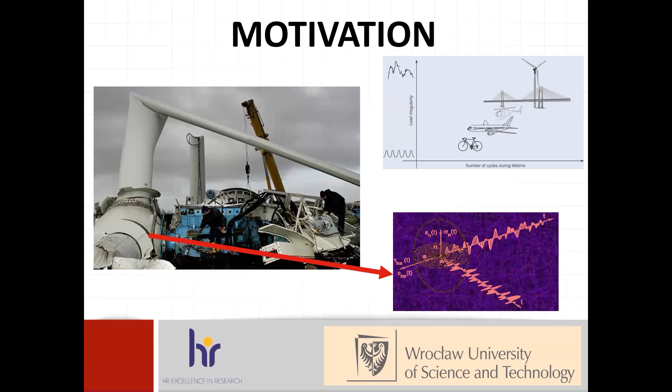Since we use multi-axial loading, if we look at the map, we can see that with the number of cycles required for failure and load irregularity, like in wind turbines or bridges, this is the crucial point in modeling: to provide robust, resistant models, for instance regarding stress ratio.

As Professor Sedlak said, bridges are the most important part, but not so much at this presentation. I think we're in second place after St. Petersburg in the number of bridges. But to be honest, in the guidelines we find it's more than 100, including pedestrian areas, so it's not as huge a number as we advertise.

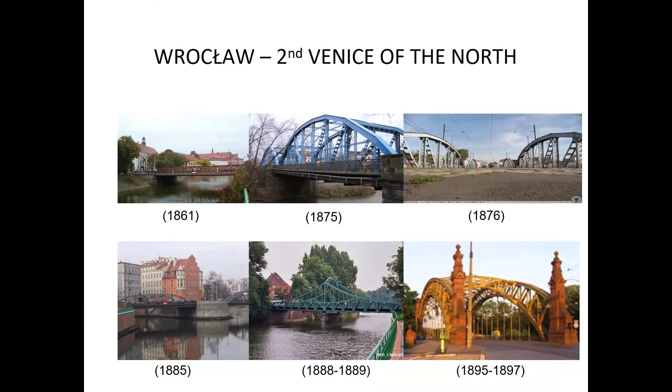Many of them were built in the 19th century, and we can also find in Europe, or in the world, a lot of old bridges, and especially from time to time we find cracks. Of course, we find cracks in many different objects.

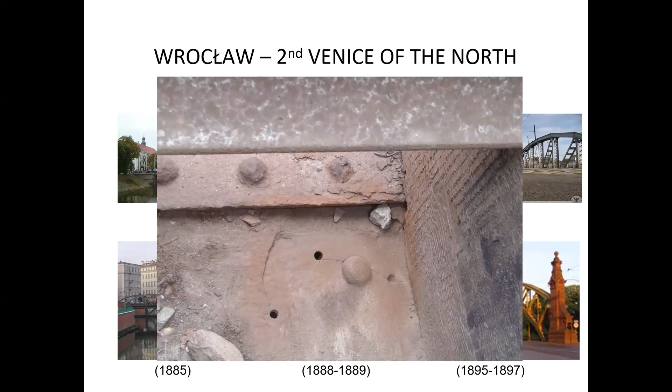The key problem is: if you found the crack, how long can the crack be operated? And typically, what is the main problem with the propagation?

I think the most celebrated equation comes from Professor Paris, who was also in Belgrade at the ICF conference. Paul Paris was with the family. Yes, that's true, but also it will be about the J-integral later.

So I memorized: delta K raised to the m power, with constant C, is the most famous, like E=mc squared in physics, equation in fracture mechanics crack growth. But in fact, sometimes we have a lot of problems with the proper description.

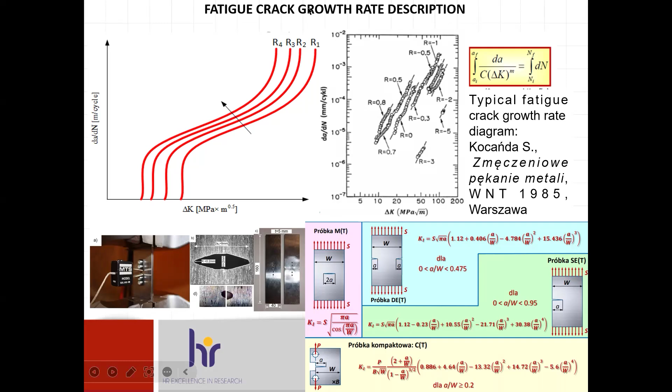For instance, if we see different stress ratios, we still need to calibrate. Of course, we can use different models, but which one is correct, regarding that E=mc squared analogy?

I found one interesting statement from Albert Einstein that captures, let's say, the mystery of fatigue growth rate description — but we always try to pick the experimental data and discuss it through semi-empirical properties.

If we look at different calculations, we still use in books on fracture mechanics a very simple approach, also adapted for numerical methods, using for instance Paris law, or maybe Walker, or Forman, with respect to stress ratio. Or, if someone is interested in more detail, one can use Forman-Mettu or the NASGRO equation, which is a 9-parameter model — really hard to find the constants for that model.

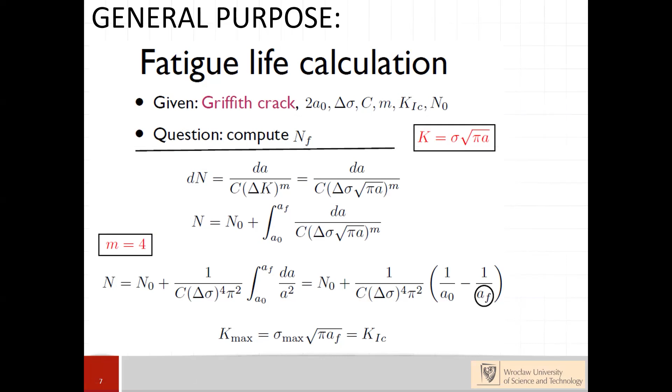We still use Paris law because it's the easiest and cheapest from an experimental perspective. We also use a fracture criterion for measuring the final stage of crack growth, and finally we can compute it by integrating the differential equation.

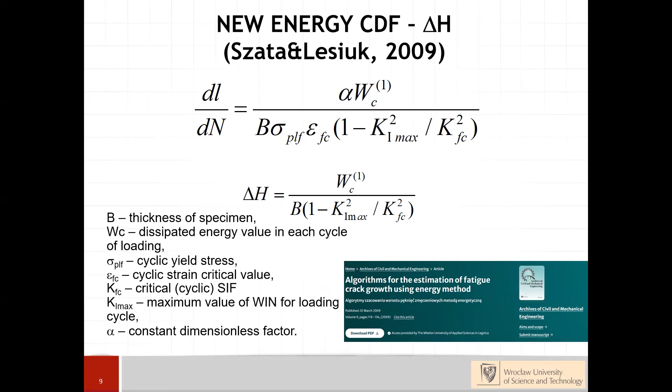However, if we look further — I want to screen a whole generation of models based on dissipated energy. We can build not one, not tens, but hundreds of different models connected to dissipated heat, energy, and strain energy density factors. In this case, it was a kind of model based on the hysteresis loop area — and what is the main advantage of this?

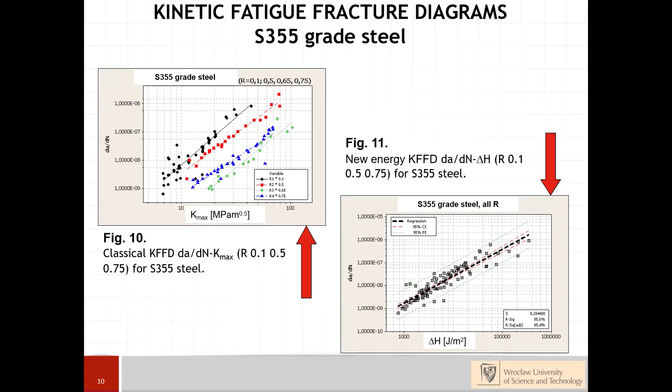This model is insensitive for the description with respect to the stress ratio, which was, of course, quite fair for modeling, but of course, it is not fair for engineers because it's very hard to use due to the much more complicated definition of the delta H crack-driving force parameter.

In the next steps, when I tried to find some relationships between different approaches, I found some important papers where different people, different groups, try to find any relationship between the dissipated energy. One of them is interesting - it's written by Mazari and Cole. We can see that they compare different energies, and also previously Fine and Davidson also tried to compare different dissipation of energy. So the key point is where we need to measure the displacement ahead of the crack tip or the load line, among many others.

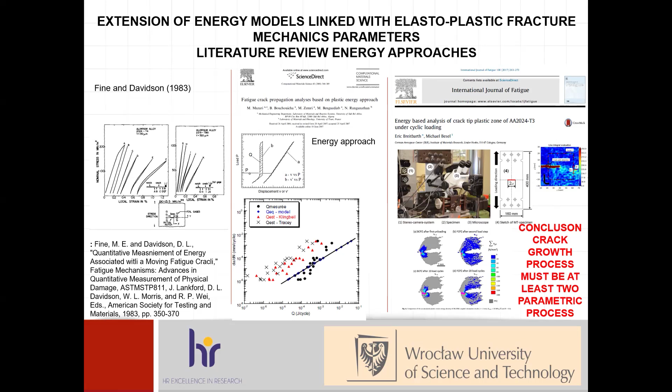If we look for the modern recent papers with respect to the observation of the hybrid computation of the stress strain analysis ahead of the crack tip, it seems that the quite old idea, which was analytically very popular in the 80s, also 70s, recently leads to the conclusion, which was also reflected in some approach, for instance by Glinka, that the crack driving force could be associated with two parametric values.

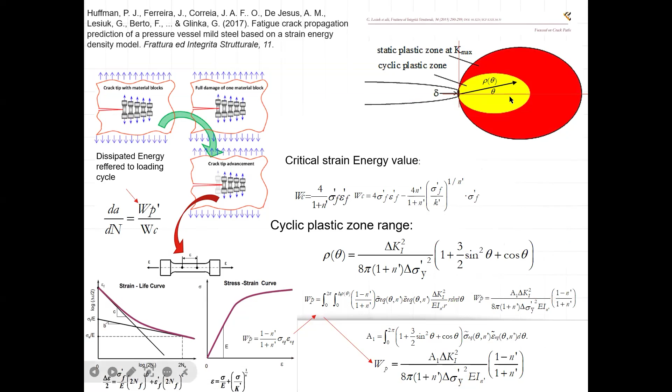And of course, we can find a lot of critical strains, and of course, the concept of plastic zone, cyclic plastic zone, and static plastic zone. And finally, we try to predict the fatigue crack growth rate based on low cycle fatigue parameters.

But in fact, if we look inside the equation, we can find quickly that we can interpret some issues as cyclic J integral. Also, this idea is not new because Norman Dowling in 1976 started to describe and introduce the term cyclic J integral to the fatigue crack growth rate description.

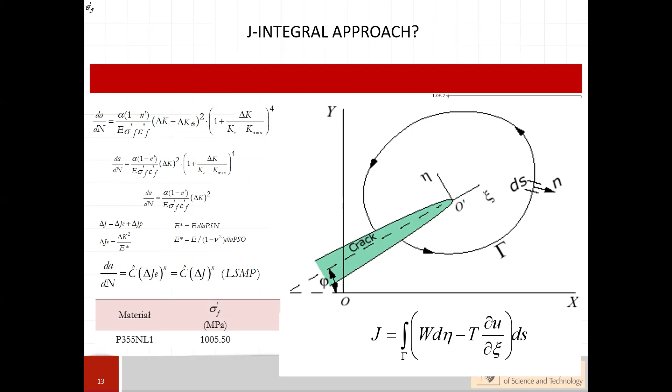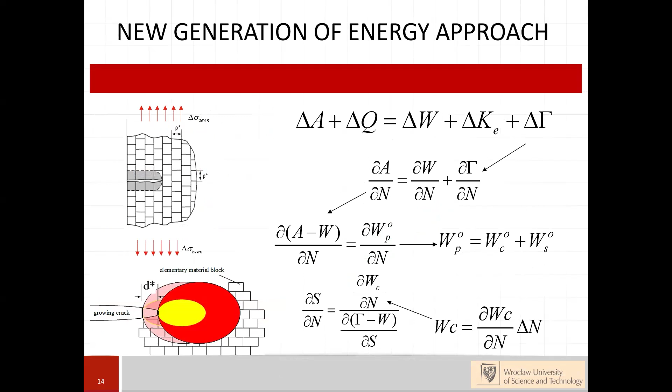And of course, from the experimental point of view, it is a nice interpretation as a difference in potential energy. And also, when integrating the models based on the first principle of thermodynamics and the energy balance between the external energy and the damage work, we also define analytically some results that are valid, similar to what we made with the old model delta H.

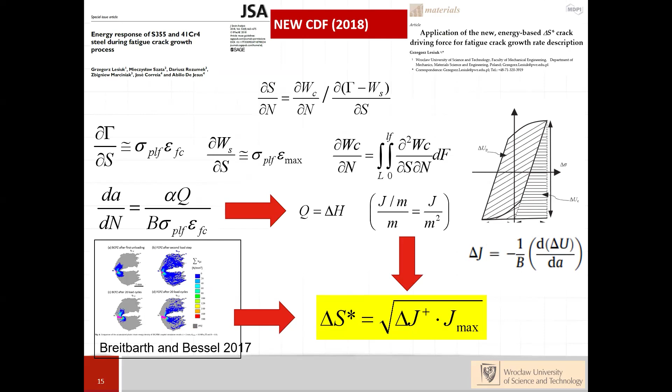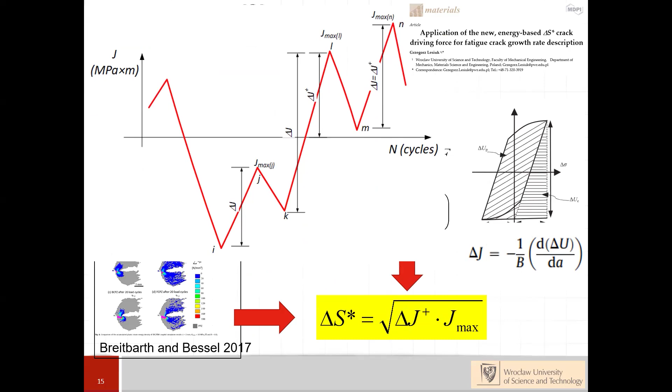In this case, to overcome the limitation of linear elastic fracture mechanics, we define a new delta S star parameter, which is of course the root square of the positive part of the cyclic J integral, as well as J max. And of course, J can be applied from the experimental side, and we're trying both methods as a crack driving force parameter.

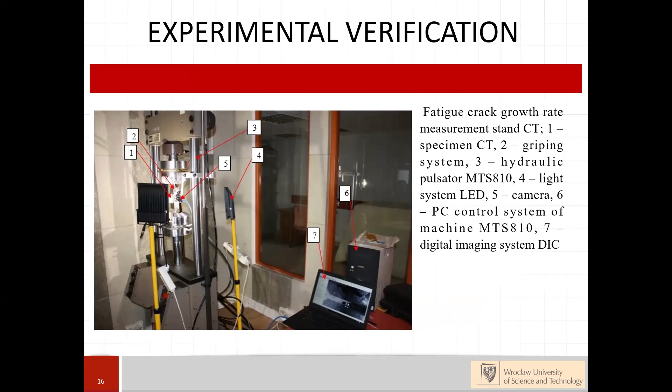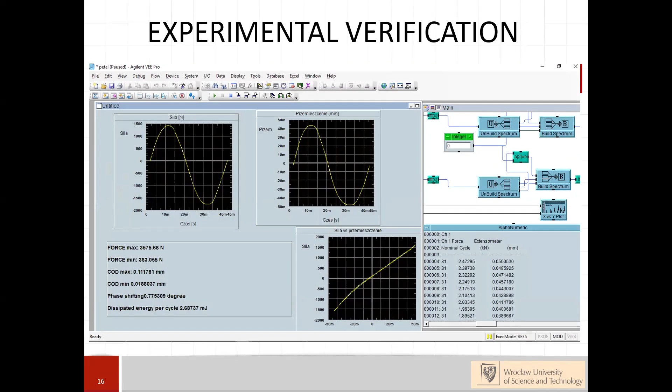From the experimental point of view, the measurement stand, of course, is a little bit more complicated than the classical one - I mean, promoted by ASTM E647 - because for this purpose, we register the COD displacement and the force. But in this case, we need to make our own extra iteration of the data by computing the area of the loops, and the loops are not as wide as in low cycle fatigue, so there's a lot of signal filtering problems. But it is possible to automate this procedure.

And in our case, we tested different types of materials. One was S355, 41 chromium steel, and of course, one other bridge steel. It was not only one, but this one was tested in our laboratory.

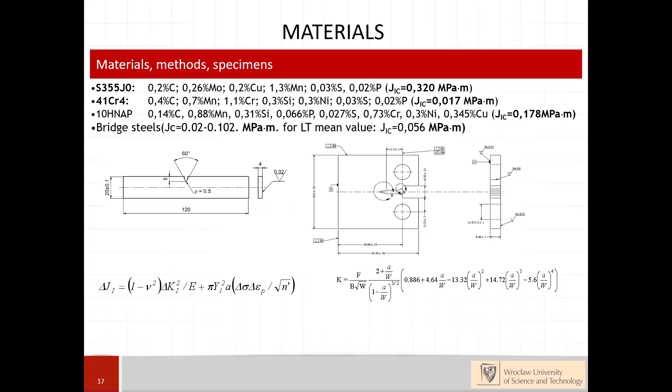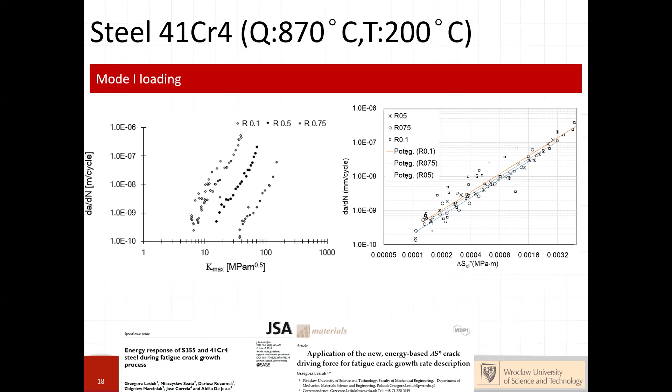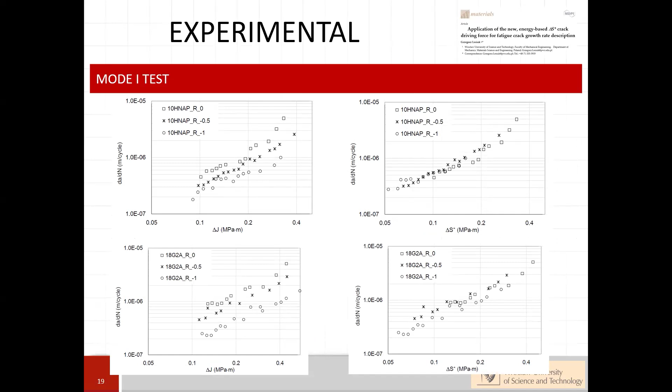And also, we thought that maybe if we replace ordinary delta K by delta J as a crack driving force, the problem of the stress ratio disappears. But in fact, it is also noticeable. So we can see that for both types of materials, in the case of the energy approach, we see consolidation of all stress ratios into one line.

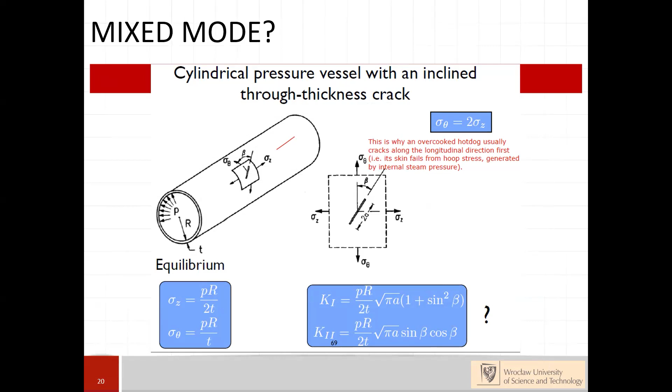It was done for, of course, mode 1 loading, but the key question always is - maybe not so important, but really important at the beginning - if we should apply this criterion for mixed mode loading conditions, for instance, like in pressure vessels, just as a reminder of what's going on.

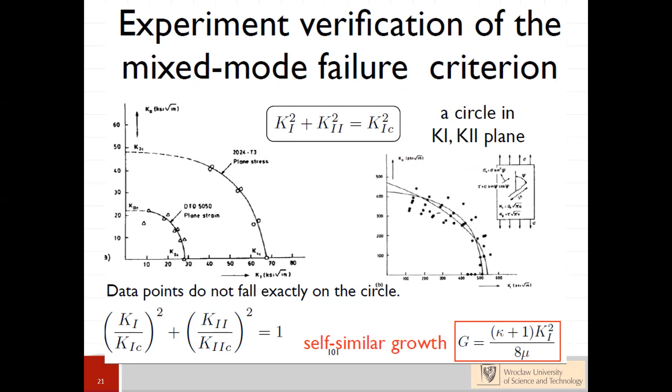If we see the number of papers devoted to mode 1, mode 2, mode 3, we still have a smaller number of papers. In our case, we decided to do a kind of experimental work based on the research.

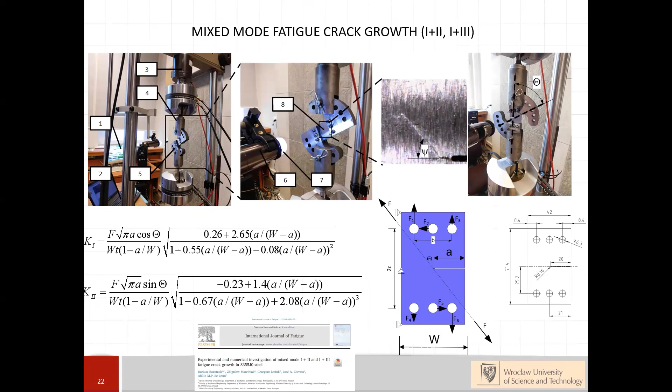The concept was quite smart because it was a plate called a compact tension shear specimen, and due to changing the angle in uniaxial machine at the beginning, it triggered different mixity ratios. Of course, it was necessary to compute the stress intensity factor, but the presented values are valid only for the stationary crack.

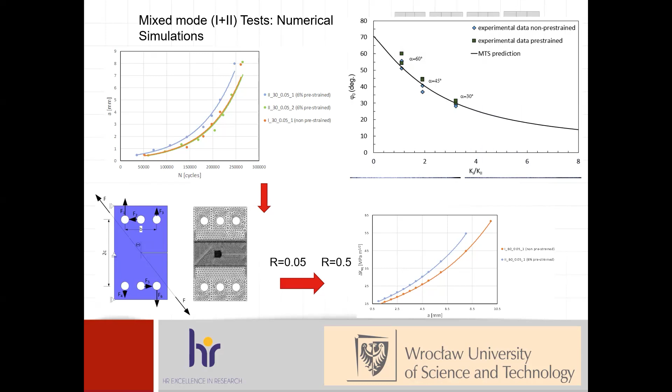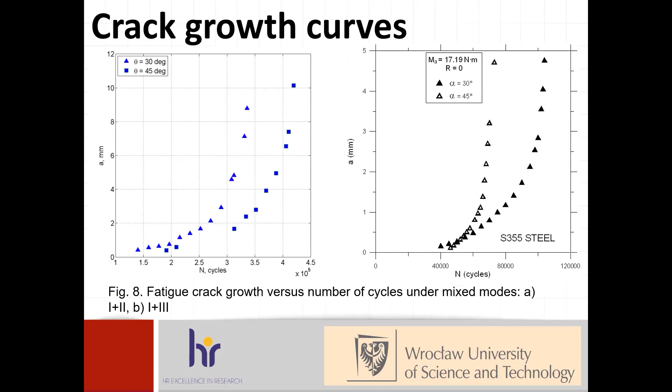So it was a hybrid experimental and numerical approach with post-processing of the data, because after the crack paths, we need to calculate every point of the crack paths and then calculate the fracture parameters based on the models. We checked the criteria for consistency with the classical formulas or strain energy density, and finally we plot the crack growth curves, which were registered in the laboratory by observing the crack position over the number of cycles.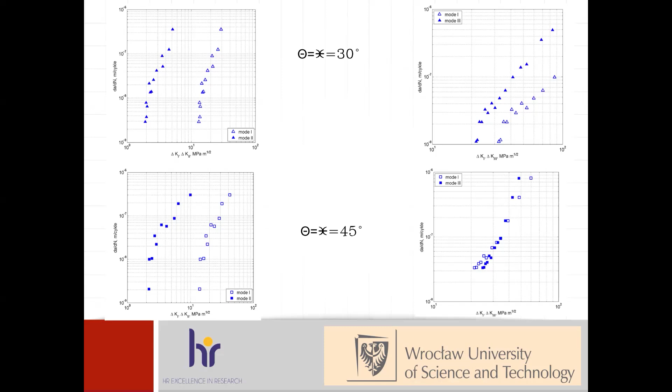Finally, we calculate, using different load angles and different mixity ratios, separate modes delta K1 or delta K2. As we can see, in the mixed mode loading condition we are also interested in the specific criteria for balance of the stress intensity factor.

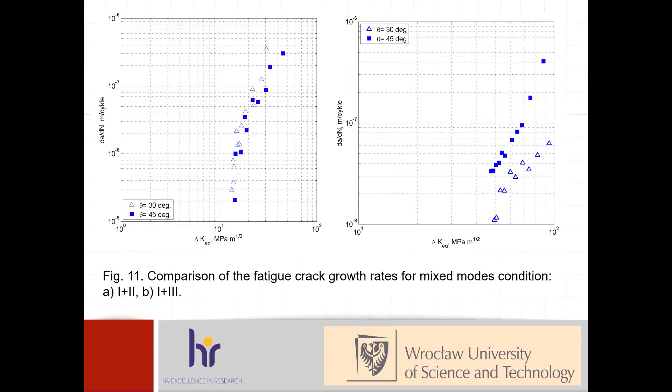There are also hundreds of formulas - maybe it's a good topic for the next lecture. We use one simple Tanaka criterion.

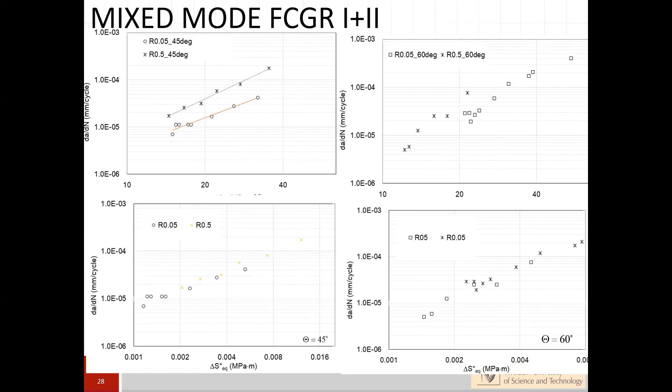Even if we use delta K effective or delta K equivalent, the problem of stress intensity factor influence with stress ratio still exists. But if we use the equivalent parameter, we get one straight line, which is also nice in describing particular movement.

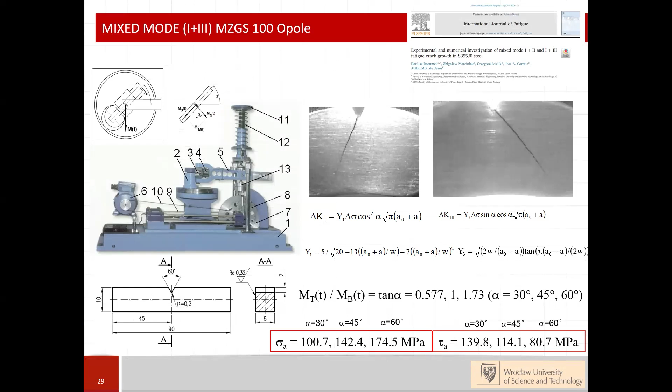Also, in cooperation with colleagues from Opole University, Professor Rozumek, we performed some tests under mode 1+3. It was bending and torsion. In this case, the procedure was the same, so we observed experimentally the crack tip position and finally the number of cycles to failure.

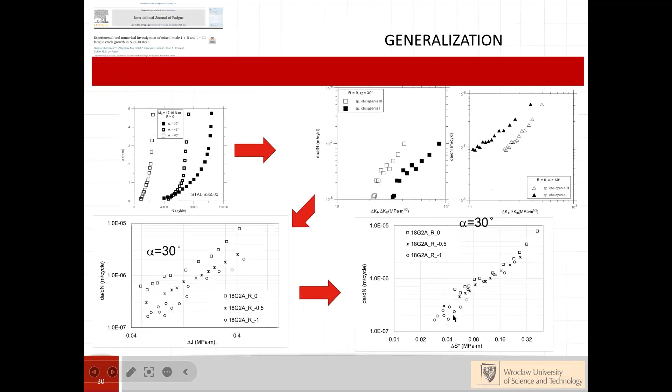We compute the fracture mechanics parameters like cyclic J, and we can see that for different stress ratios for S355 we still have one consistent curve.

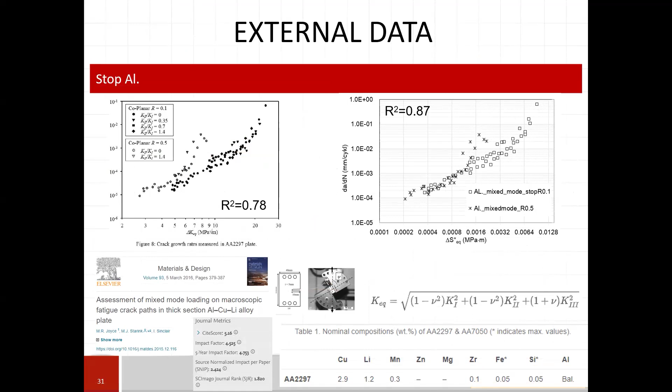We also tried to validate against external data. We found raw data in the literature, retrieved it using the delta S star parameter, and it was great that we found good consistency for it.

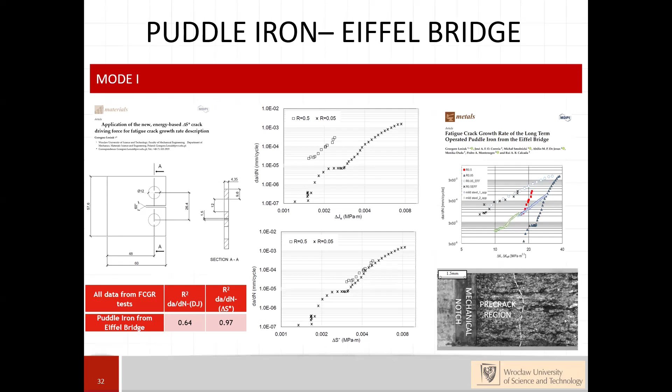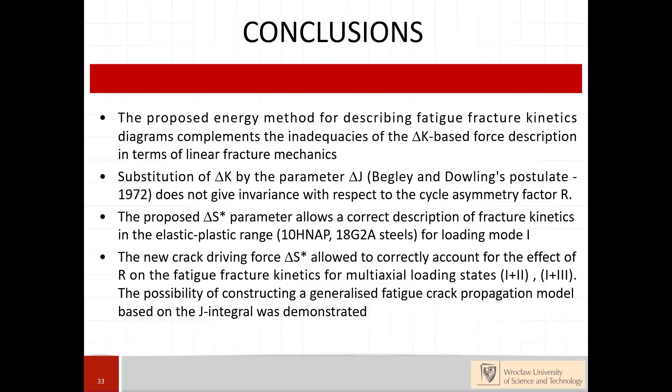Just to conclude a few lines - this is just a suggestion to follow the energy approach, and to take some strain energy parameters which we can easily compute during the simulation process. In the future, maybe we can extend it to different combinations of modes.

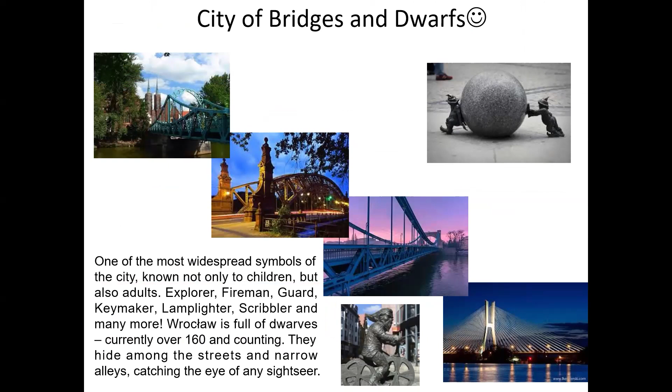Poland, Wrocław, this is the southwest part of Poland, not so far - more or less 120 minutes flight from Belgrade. Two words about Wrocław: it's one of the largest cities in Poland, city of bridges, and of course bridges and dwarves. When I met my colleagues from Serbia yesterday at the cocktail, they told me about the bridges and the dwarves. So please discover it all together. Thank you very much, see you soon in Wrocław.